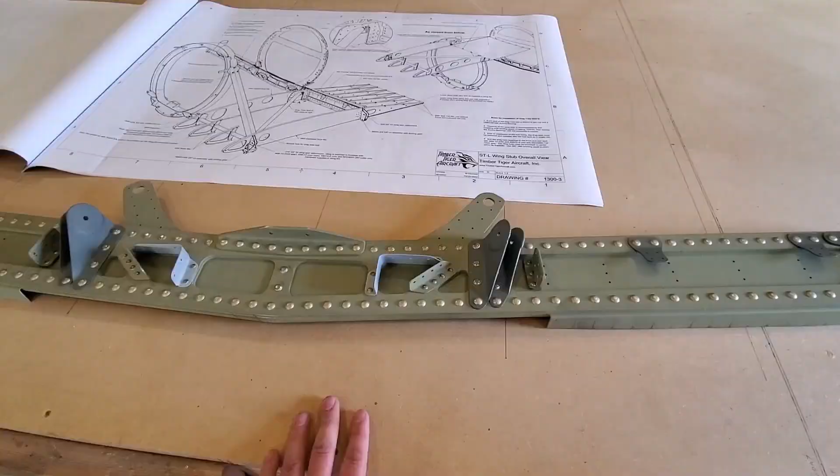Timber Tiger Aircraft is proud of all it's accomplished in the last several years.

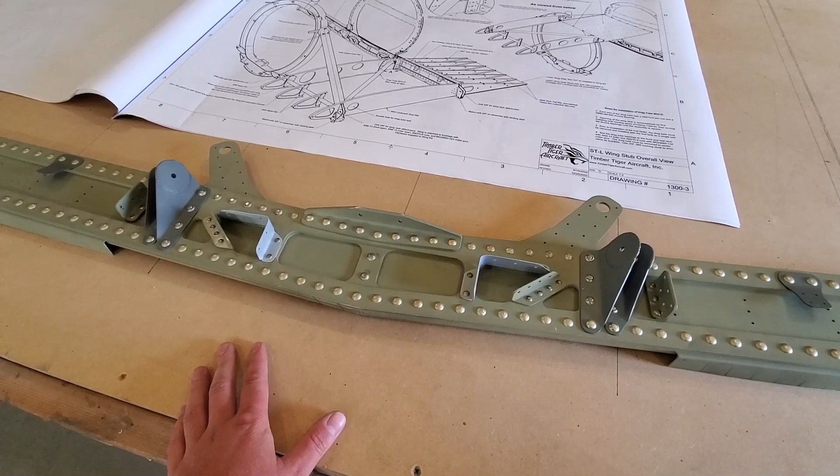For instance, our fuselages now are completely match drilled. That means you can assemble a fuselage on your table without any special fixtures, Cleco and go. We've got a video about that, about an hour and 10 minutes long. Check that out and see exactly how that works.

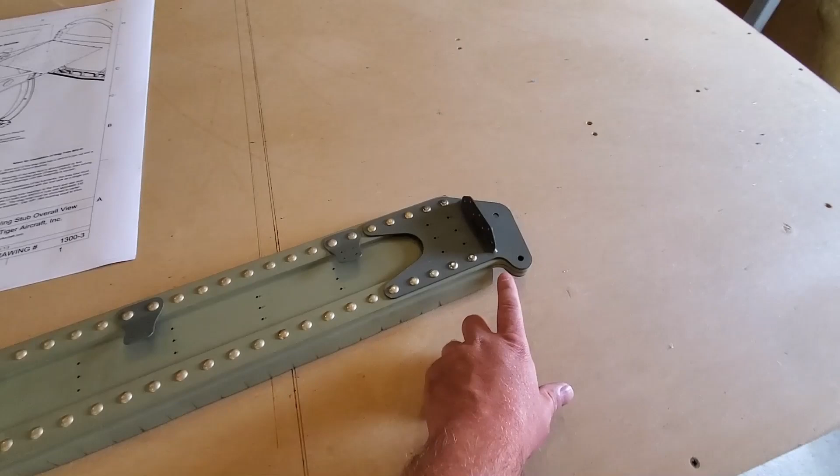But another thing that we're also very proud of is this assembly here. This assembly is our rear stub spar. It goes through the fuselage and attaches to the landing gear here, the aft leg on the landing gear.

It's got your lugs for your fuel tank straps here, a wing rib bracket, and some more tail ribs that eventually go here. Your drag tube comes through here, passes through the fuel tank and into the forward landing gear attachment.

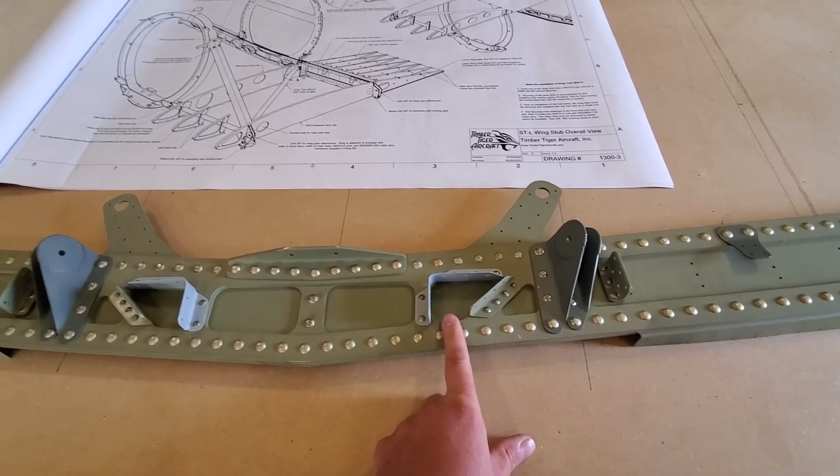It's got your longeron supports here and your skin support, a bulkhead support and your rudder cable guide. And of course, it's got your control stick mount.

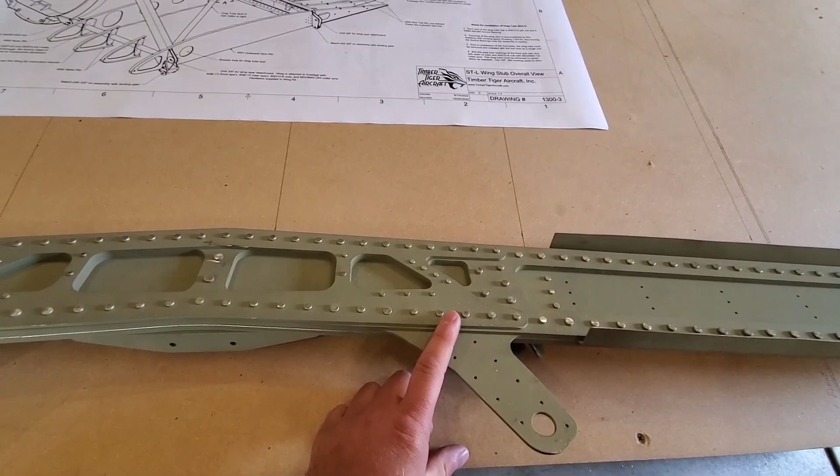Now, this is a built-up unit, a very heavy built-up unit made of laminations of aluminum. This aluminum we cut here at the shop, just like everything else we do. It's all CNC'd. This comes pre-drilled right off the table, and of course you have to open up the holes as you're installing your rivets.

Now, if you don't want to build this unit, that's understandable. It is a pretty critical unit. It does take a lot of force.

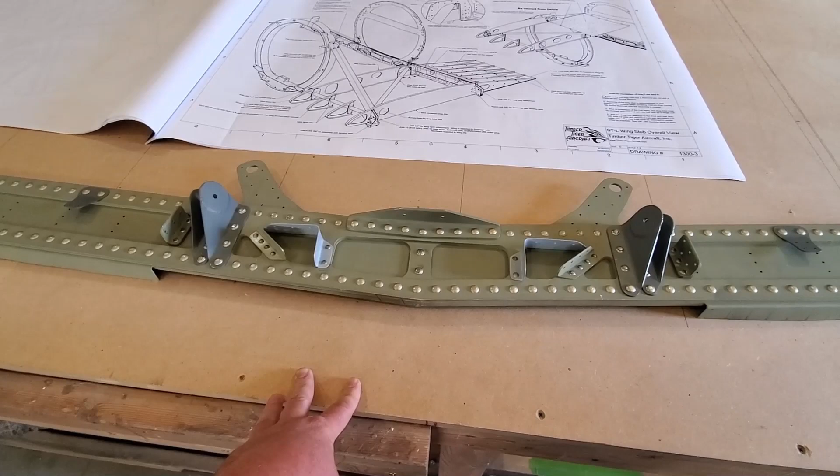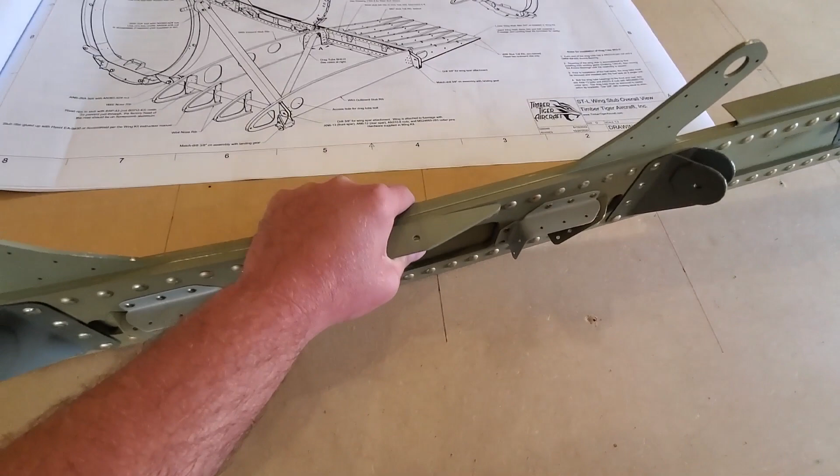Especially since you have the wires pulling on the landing gear through there, that force gets translated into the center here, along with any compression loads that we get from the wing spars. Those wings are wire braced, so when you get a load on the wing itself, that turns into a compression load in the spars. So it is a very, very important piece to do your best on. Any nicks, scratches, that kind of thing should be removed.

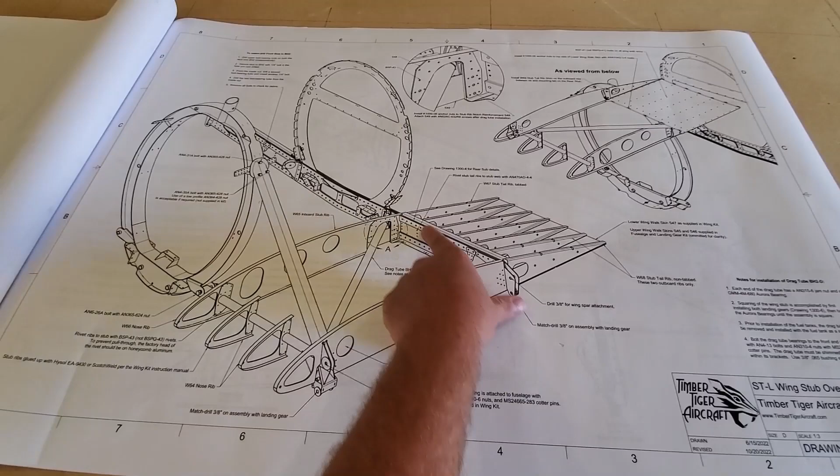So you'll see the drawing here for this rear stub. This is a stub overall view. That means you've got your bulkhead 2, this is the heavy steel bulkhead. You've got your bulkhead 3, which is aluminum. You've got your rear stub. You've got your tail ribs, your drag tube, and of course your outboard and inboard ribs.

And don't forget the fuel tank fits in here now too. So this drag tube is removable. That's why this is notched out and goes up from the bottom.

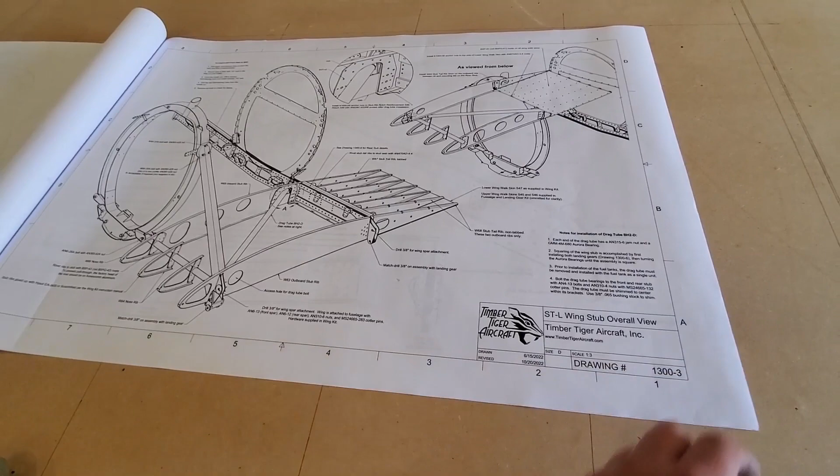Fun thing about the fuselage kit versus the wing kit or stabilizer kit, as you recall with the stabilizer kit, there's a lot of layout and stuff like that. And the problem in that is that people sometimes can be afraid of measuring. I don't understand why, but it's true. So we do have a manual that goes with the tail surface kit and wing kit.

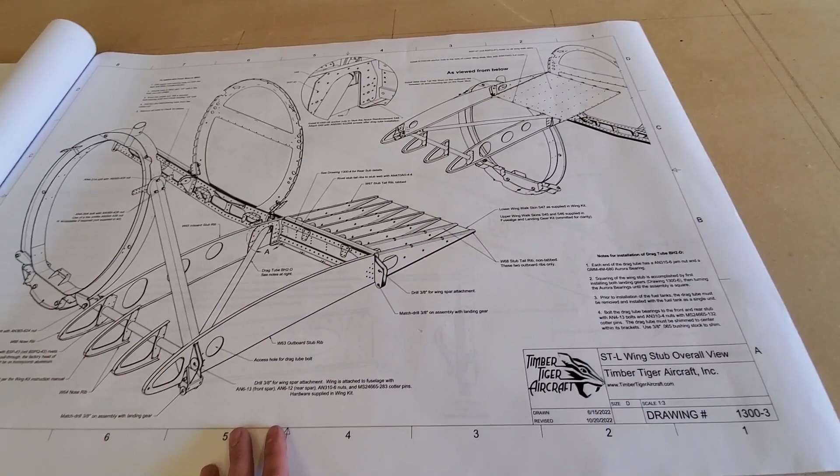The fuselage is actually really easy and really fun in that it's more of an assembly task. Since a lot of this stuff is pre-drilled, it's self-locating. You don't really need to worry about where is it going, it kind of tells you. So that's the fun part about the fuselage, is that your manual is right here. This is your manual, unless you're scratch building your own fuselage, of course.

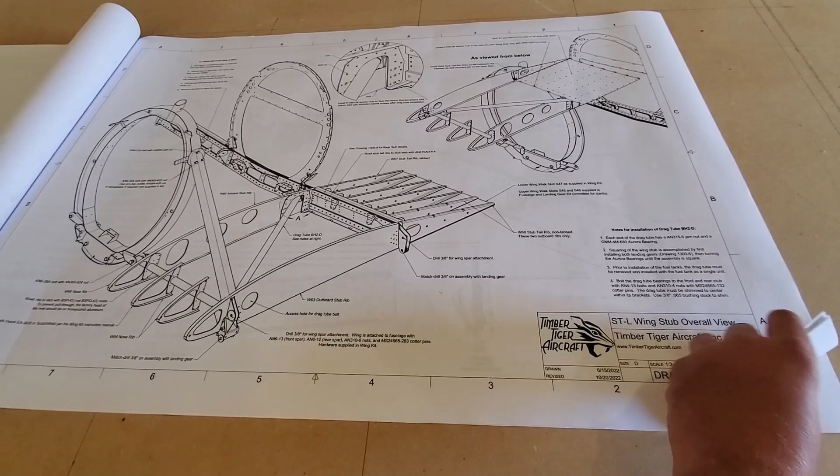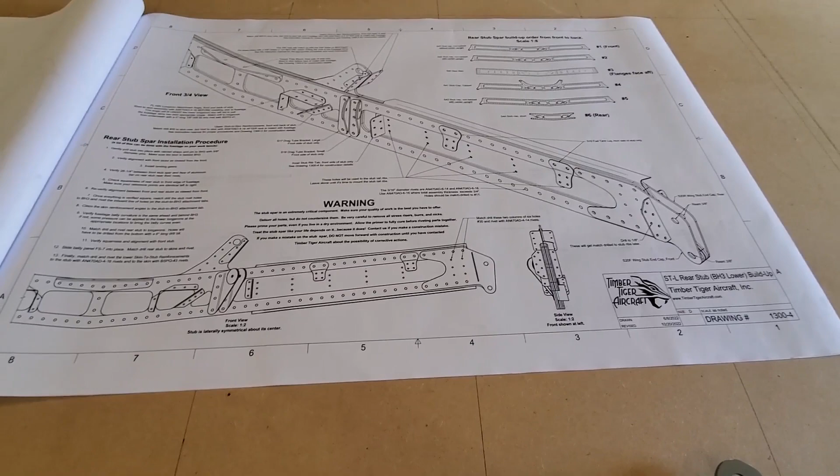Very straightforward stuff. Here's the rear stub spar. As you can see, the manual is on the drawings. We've got a warning here. It just says that it's a critical component, make sure that you do your best work. Now, again, if you are afraid of doing this part for whatever reason, which you shouldn't be, I mean, it's one of those things. If you take your time, you'll be fine.

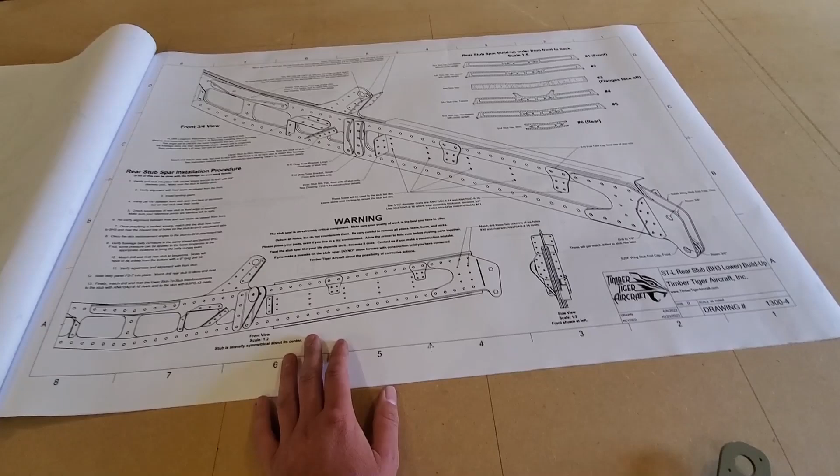But if you don't want to rivet this all together, we do offer that as a quick build option. So if that's the case, this particular page would be kind of moot for you, except it will educate you on what is what on the stub spar.

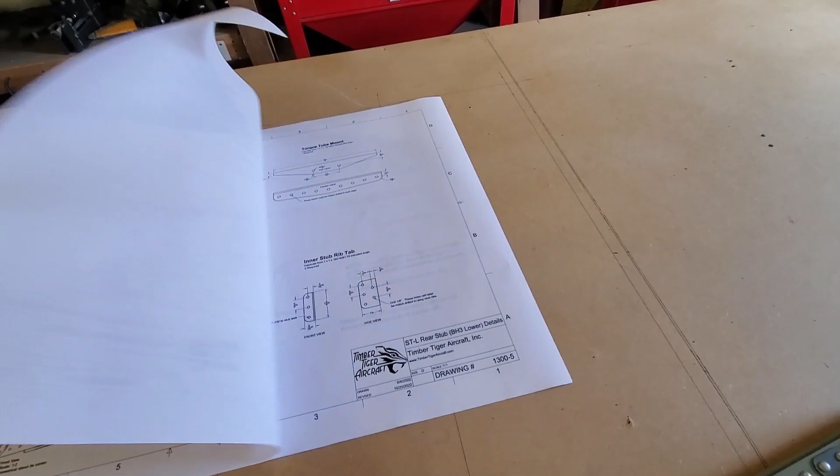So you can see here, these are the different laminations, and we CNC these all in-house. All you have to do is make sure they go in the right order, open up the holes, and you're ready to go. These are the brackets that go on the stub spar. These are made out of raw materials that we send in the kit, and they're very easy to make.

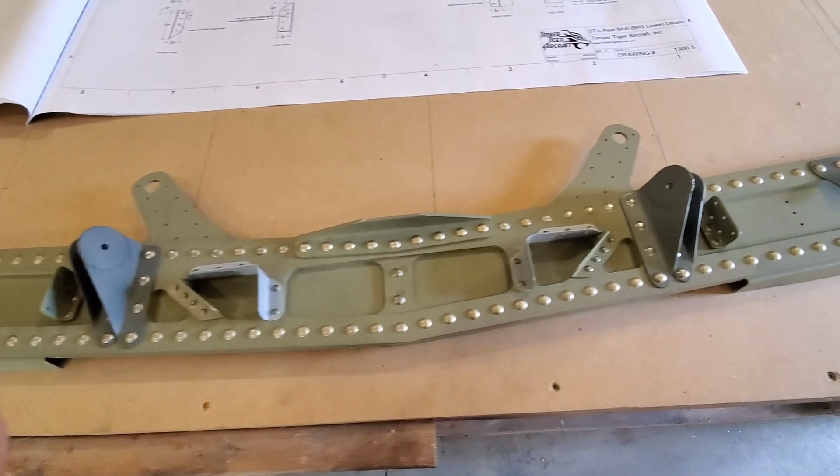So I think what we want to do now is show you an overall view of the stub spar, and also how that looks installed on an airplane. This is that stub spar installed on an airplane. It looks way different once it's installed.

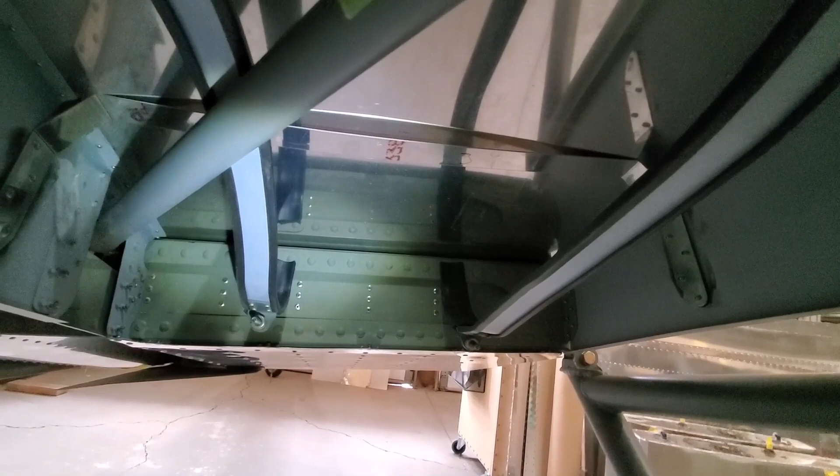But you can see it back there, and of course we've got your fuel tank straps right here. On some kits, the earlier kits, we had straps top and bottom, steel straps. Now on these later ones, we actually have a set of 3 straps right here. They go left to right over the top of the tank and back into this other rib. The reason we did that is it's just so much easier to get this thing mounted and installed in the wing, the fuel tank.

So this here is your drag tube. This has a Heim joint at each end to allow you to change the squareness of the wing stub. Now, we found out that this fuselage is so easy to manufacture squarely that this drag tube is really only here for flight loads, not necessarily squaring of the wing stub during assembly, but you'll still want to check to make sure that everything is square.

So your fuel tank goes in there, and then of course you've got some access holes over here. You've got your fuel tank fittings that go through those, and then up into your fuselage. Try and keep fuel out of the fuselage as much as possible, but there are some lines that will have to go through there.

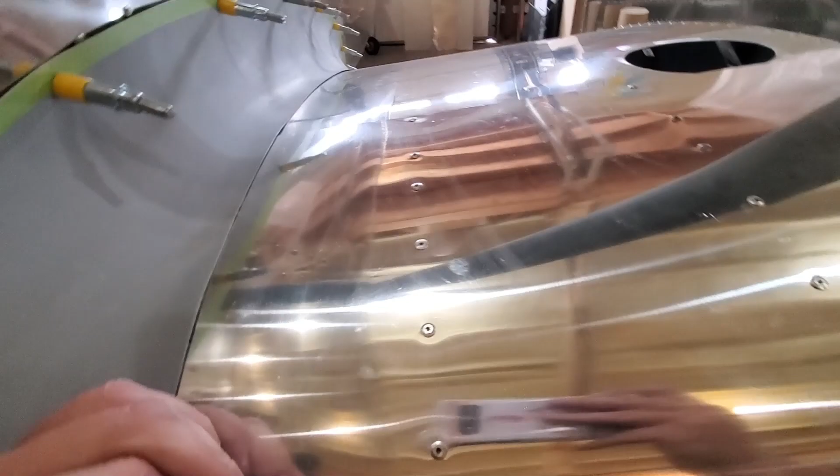And then, coming up here, you can see the top of the stub is fully skinned now. On the prototype, the fuel tank was in the nose. Once we learned more about our CG and what we had to work with, we were able to get the fuel tank back into the wing stubs.

But this all gets fabric covered, no different than the prototype. There's a fuel tank in each wing, and they are approximately 10 gallons apiece. So way more fuel than we had in the prototype, and it's out of the cockpit, and that's the big thing.

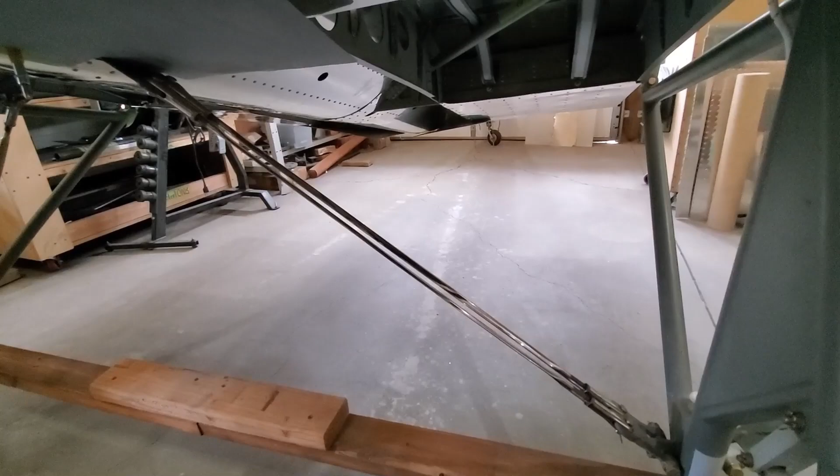Anyway, you can see we've got our counter wires here. These counter wires take a lot of load, and they go up from down here at the landing gear, from that weldment, up into a weldment up here. And those are, of course, like everything we do, TIG welded.

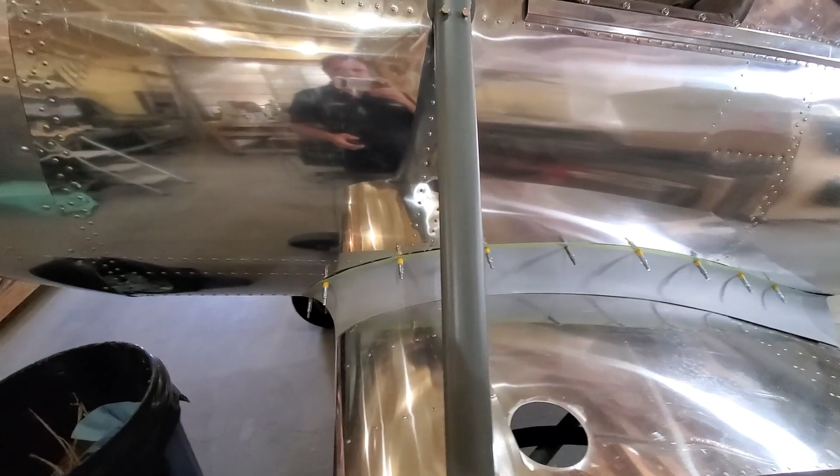So yeah, that's the purpose of that stub spar in the back there. It takes a lot of load, not only the flight loads, but the fuel tank loads as well. And the front stub, we don't really need to cover that just yet. It's a lot simpler, it's just a weldment with a tube going through it, so we don't really need to worry about that a whole lot. So yeah, that's the wing stub.